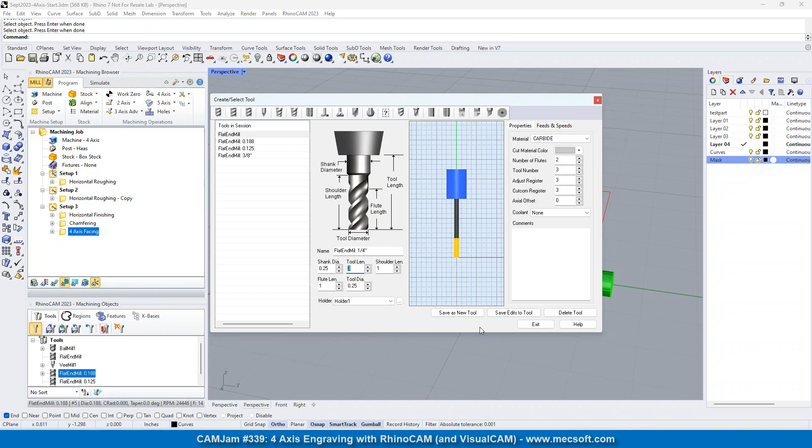Now we're going to do an engraving operation. Let's see what we got here. Just 1 second. Okay, so I do need another flat end mill, so I'm going to create this end mill, 1/4 inch. Okay, flat end mill. I'm going to save that as a new tool. It doesn't need to be that long though. Okay. I'm going to save that as a new tool.

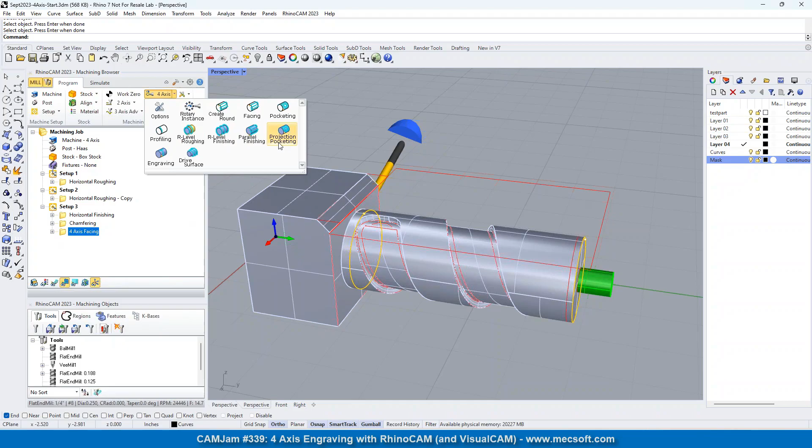Okay, so let's go ahead and do the engraving. We're going to go to 4-axis, engrave. Now, 4-axis engraving works the same concept as in 2-axis. The tip of the tool will follow the geometry that you select. So we're going to use engraving. And we've already got these curves selected. So we're going to go ahead and tool, use the 1/4 inch, cut parameters. That's fine. We'll do it at bottom and 1 cut level.

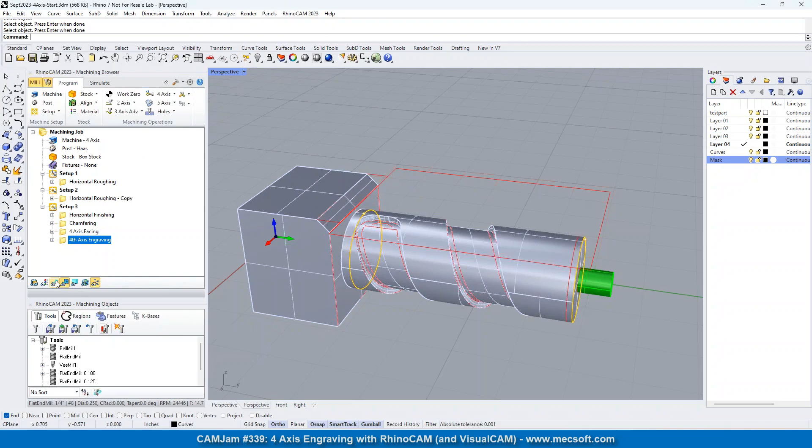So basically what we're doing is we're going around and we're cleaning up this end and we're cleaning this end as well. Okay, so that should all be okay. Let's go ahead and generate that. So there's our engraving toolpath right on the curve. And let's go ahead and simulate that. Let's slow that down. Let's do that engraving up there.

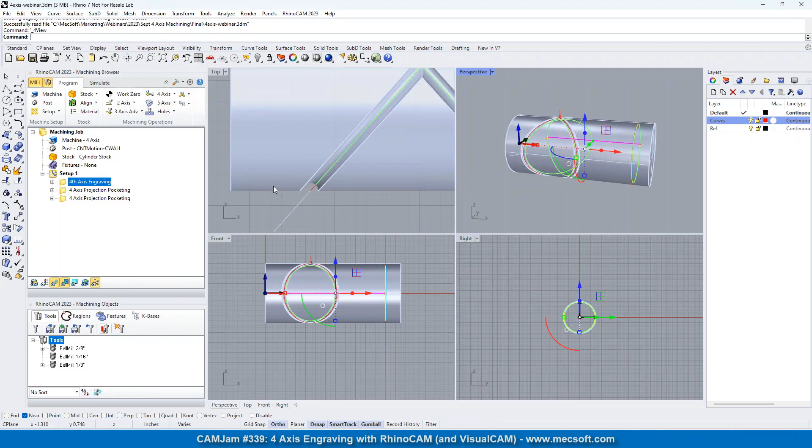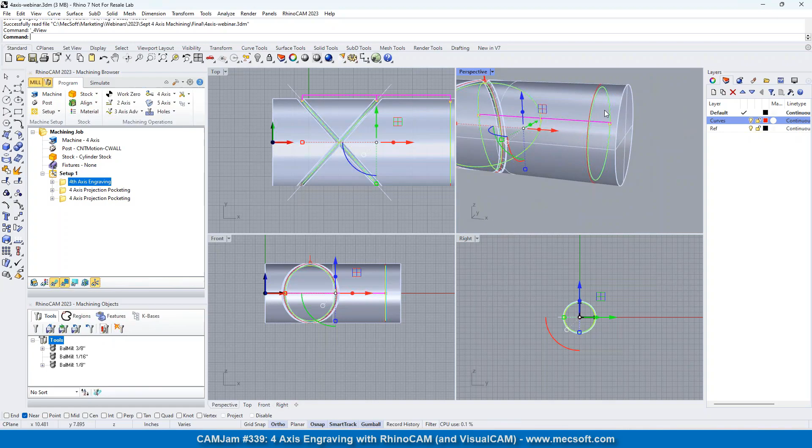So basically, let's look at the curves. I got curves also. So if you look at the top of this part, you'll see that this groove is created from these lines that are just 90 degrees cross-hatched, okay? And then I wanted to engrave that, just have the tool follow the base of that curve or the base of that pocket. So let's go ahead and simulate that and show you how that will come out. And we also have a curve over here that we have selected. We didn't model the groove, we just had the curve. So let's go ahead and simulate that.

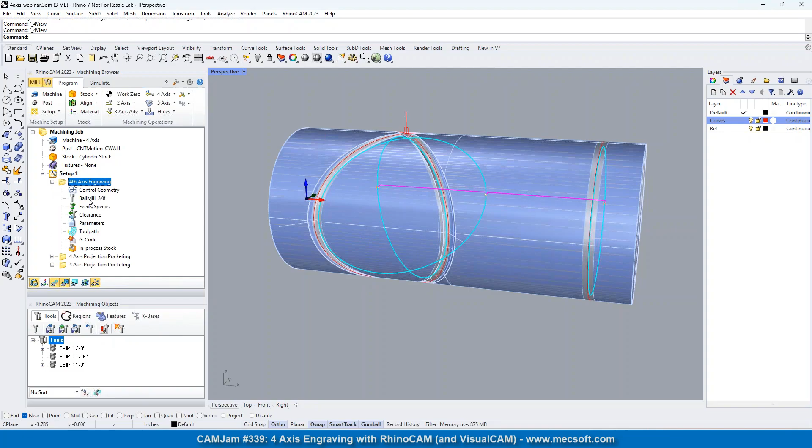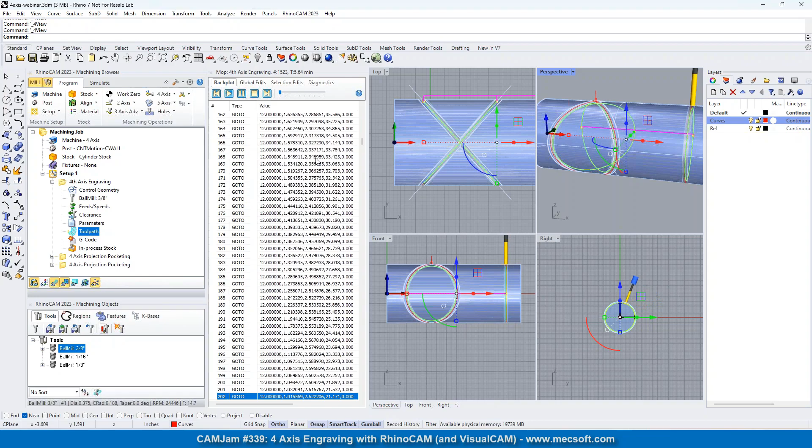Okay, so let's go over here. Now, I want to go ahead and turn the stock on so you could see it. And then I also wanted to show you the tool motions. So let's do that for a second. Let's show that tool. Get it into position here. Okay, that should work.

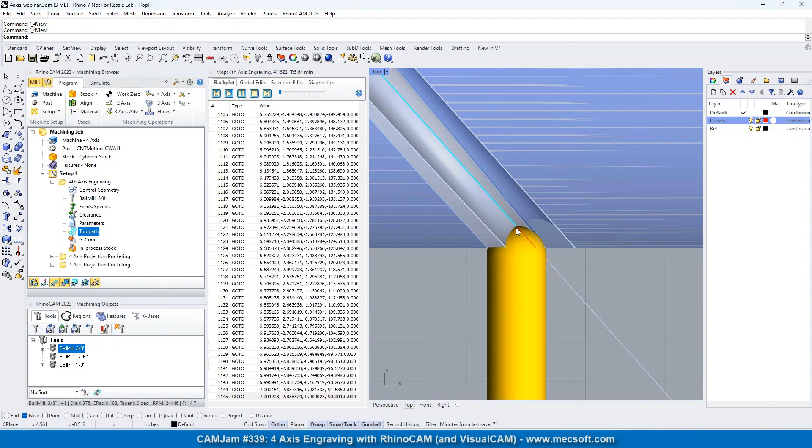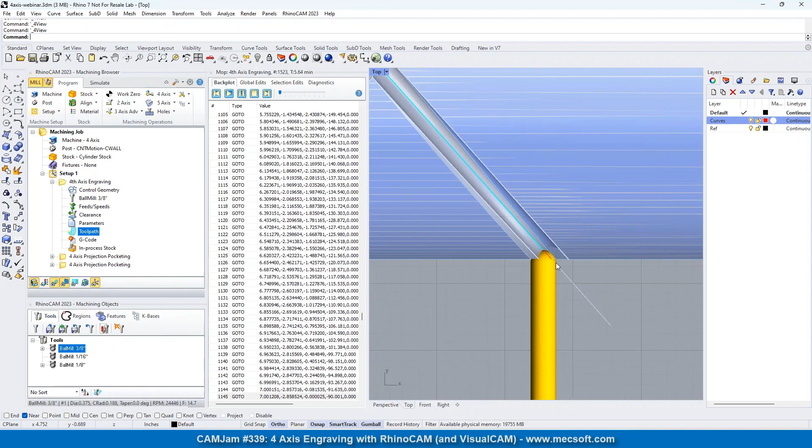So what you see here, the tip of the tool is on the curve. As in all engraving operations, the tip of the tool is on the curve. But you also see that the tool axis orientation is normal to the rotation axis, okay? Which is not going to cut this groove correctly. As you can see, it's already gouging in this groove. So the tool is following the curves, but it's not following the edges of the groove.

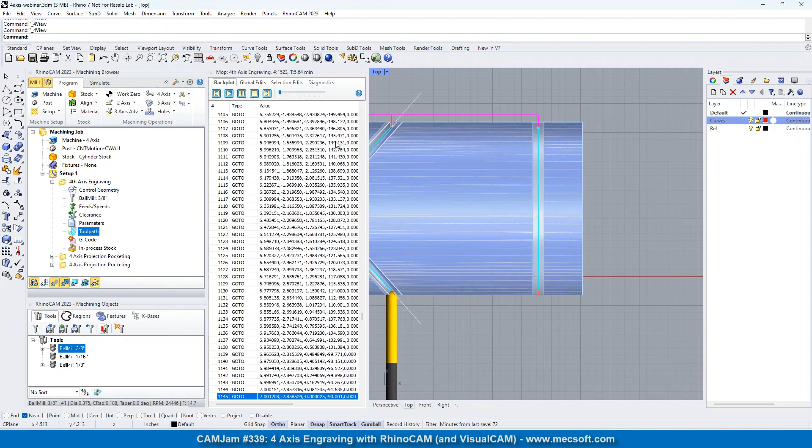Now this one over here came out perfect because the curve was axially, I guess you could say, normal to the axis of the part. So this one over here came out perfectly. Let's see if we can get back over here a little bit more. Scroll up a little bit. Okay. So let's turn the part off. Part on, part off. So this one machined perfectly.

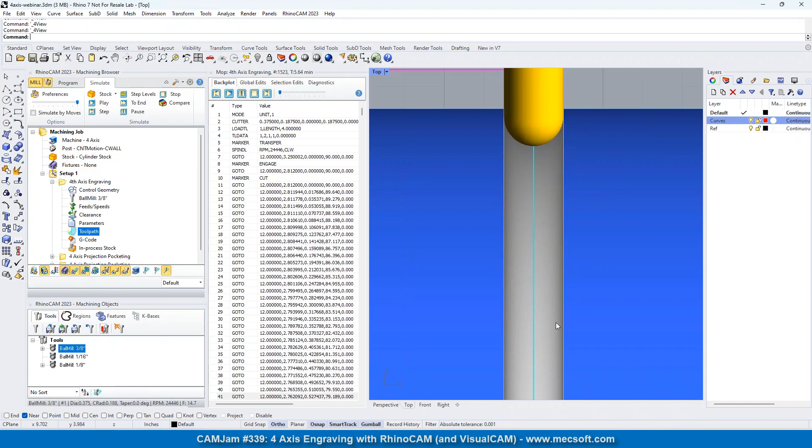So if you got a groove that's normal to the rotational axis, it'll cut that perfectly with engraving. But if your curves are not normal to the rotational axis, you're not going to get a correct operation. So I just wanted you to see how the tool is oriented in all of the operations except for the drive surface. The tool is going to remain normal to the axis. So how are you going to program that?

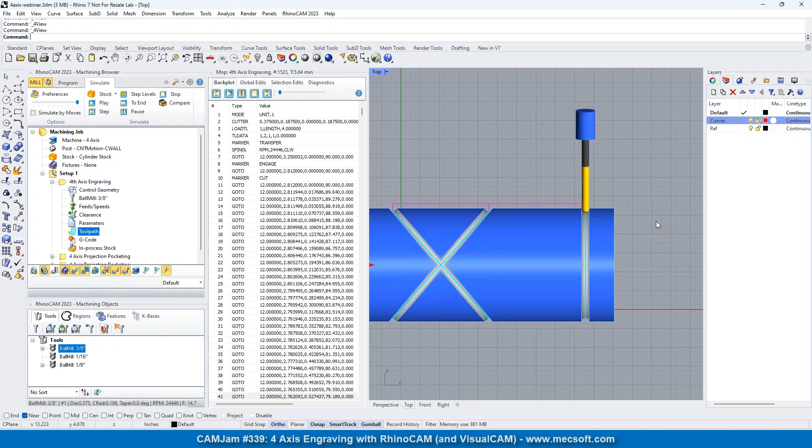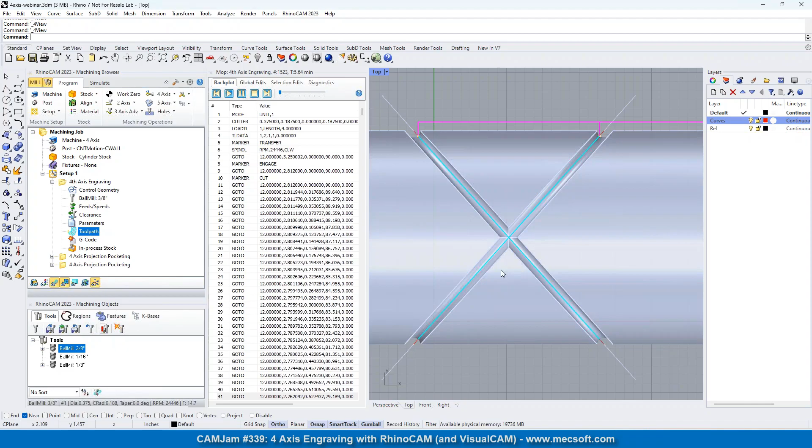Hey Don, quick note on this. On the two grooves on the left-hand side, the way the modeler has created that groove is to make that groove normal to the cylinder surface rather than the axis. And so, if you want to machine that exactly like we did on the right-hand groove, you really would have to use our 5-axis methods, surface normal methods or surface projection method, where the tool is actually kept normal to the surface. So, it'll be normal.